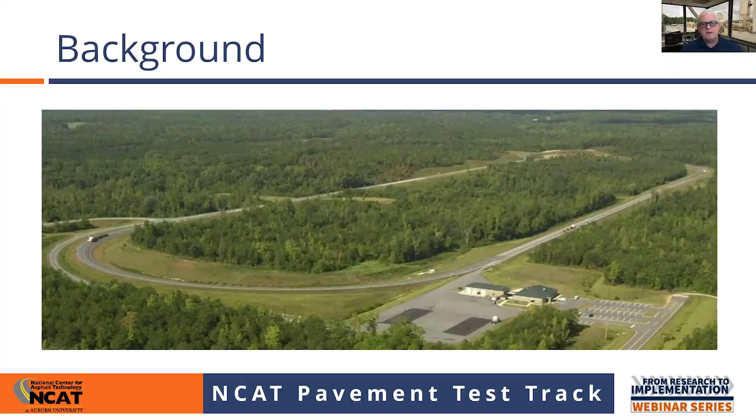But sports courts is different. We've never built a sport court at the test track. We do work for state DOTs, for FHWA, for private sector clients. We do pavement preservation research that might be very relevant to cities and counties, but we've not done any sport court work. So now in my position with Asphalt Pavement Alliance, I was asked to do a deep dive on this topic and recently put together a presentation on it. And so that's why we're doing this webinar, because very recently I did a sport courts presentation and trails presentation for the New Jersey Asphalt Pavement Association.

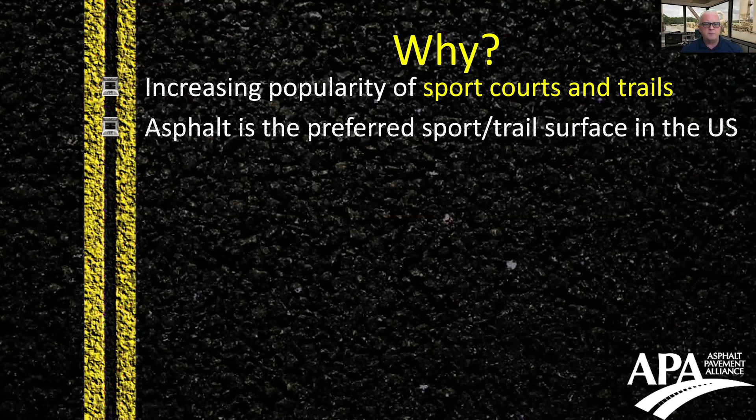So before we get into the background, why are we talking about this? Well, sports courts and trails are growing in popularity. Think pickleball courts—they're springing up all over the country. Asphalt is the preferred surface. It's the best material to build with, and there are some reasons for that.

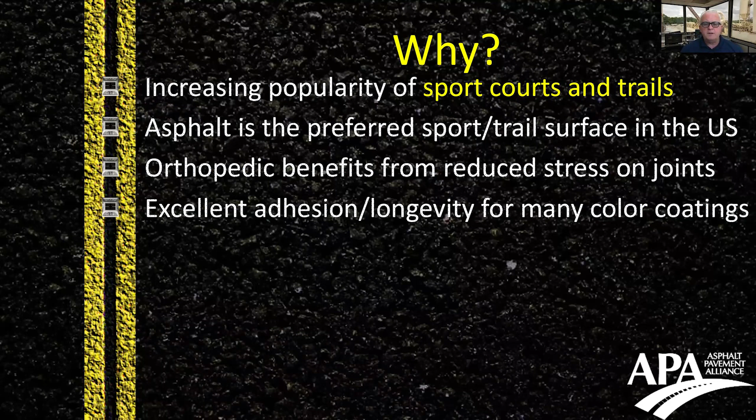There are orthopedic benefits from reduced stress due to the flexible surface you get from asphalt. You get excellent adhesion and longevity when you use asphalt with many of the color coatings that are used, and excellent weather resilience—hot versus cold, dry versus wet—really good seasonal survivability. They're durable, economical, and easy for owners to maintain.

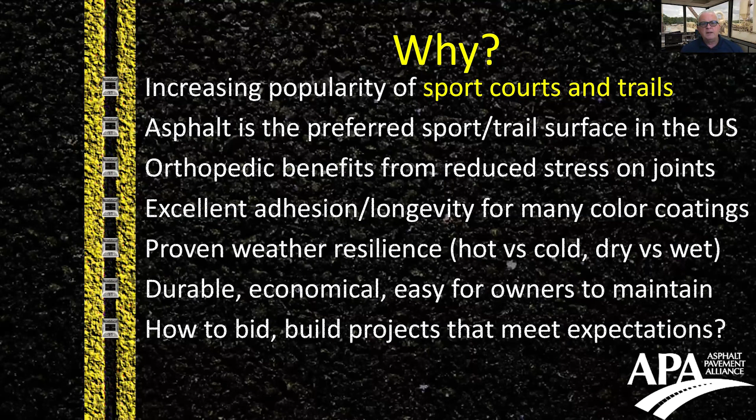And the big question, which is really why I got into this: if you're a contractor who's been doing parking lots or roads, whether high traffic or low traffic, how do you bid and build these projects to meet the expectations of the owner so it's not a closeout and acceptance nightmare or a maintenance nightmare? That's really where all this came from, and it's why we so appreciate Scott being here with us today to share his experience.

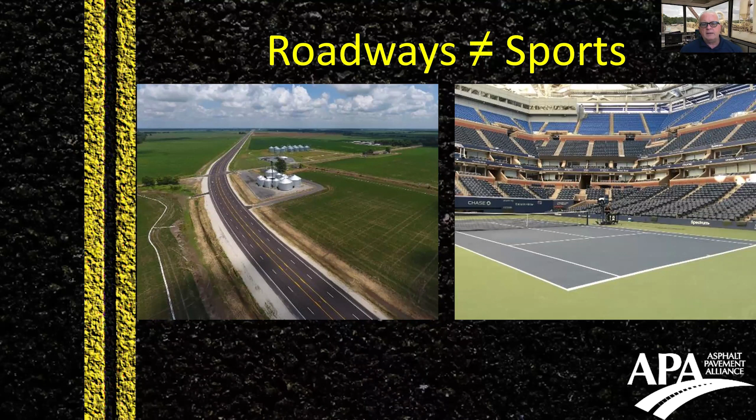What I'm going to share with you today is really a stripped down version of that. So that's the background, and the main initial point here is that roadway surfaces are not equal in any way to sport surfaces. It's a completely different type of work, and that's why it's really important that we meet today to talk about this topic.

ASBA is the American Sports Builders Association, and they have a really good website with resources at sportsbuilders.org. If you want to learn more about what will be required of you in terms of a specification to build these types of facilities, you can go to sportsbuilders.org and download a specification and see information about specific products and such.

So what's different about these facilities? Well, surface tolerance and macro texture are really key things. Surface tolerance is what we're trying to control to avoid bird baths and depressions that create functional problems on these surfaces. Macro texture is essentially the roughness you feel on the surface of asphalt when you run your hand over it.

High-speed roadways tend to have higher macro texture. Parking lots have lower macro texture. Sports courts have low macro texture, meaning they're smaller, finer mixes. Heavy vehicle loading is not the design criteria for sports facilities, unlike roads. Resistance to cracking is a primary consideration with these surfaces.

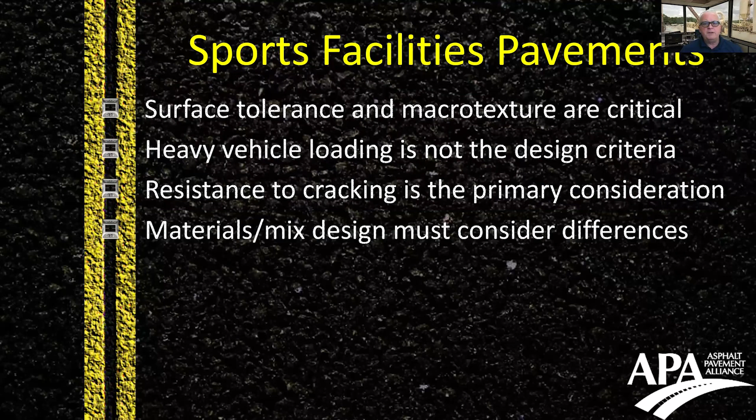The materials and mix design used for these have to account for these differences. If you're a paver working on one of these, you don't just call a plant and say, hey, what kind of mix are you running today, send me so many tons. You have to have the right kind of mix.

I think Scott is going to have a few things to say about that when it's his turn to speak. It's a good idea to use a DOT approved mix producer, because when they're DOT approved, they have to have a QC plan, the plant has to be inspected, and they have to be credentialed. Of course, we encourage you to use a SAPA member, a State Asphalt Pavement Association member, and there needs to be a QC plan in place to make sure the mix you buy meets your expectations.

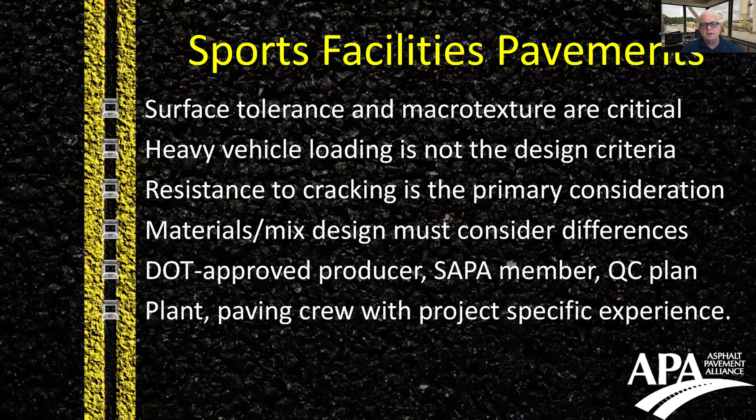One of the key things for success here is you need a plant and a paving crew with project specific experience. In other words, if you're going to build a sport court, it's a good idea to do some research to find someone with a resume and a specialty in this area, like Scott's company has, rather than going through some open competitive process without checking the credentials of the crew. You need to make sure you have someone who's proven they can do a good job with this.

So the Sports Builders Association has an established set of mix design criteria.

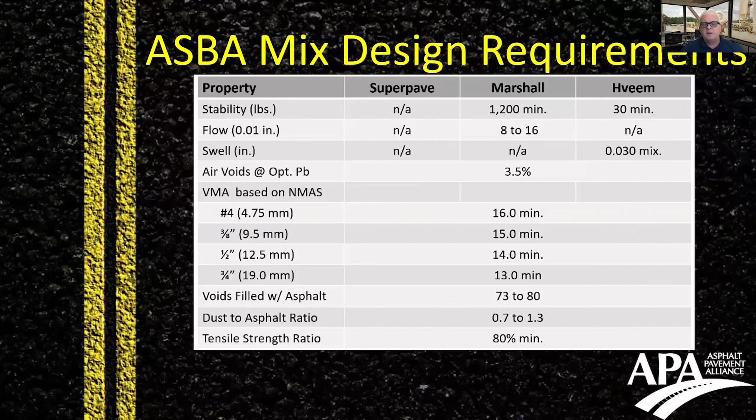These are Marshall mixes based on the specification I looked up, and there's a VMA requirement. Essentially, it's just saying we want this to be a healthy mix. It's a 3.5% air voids mix, with a Marshall stability and flow requirement, and even a TSR requirement to make sure it has good resistance to moisture damage. These are all criteria familiar to those of us who do roads and parking lots - specifications intended to make sure the mix you buy is going to be a healthy mix.

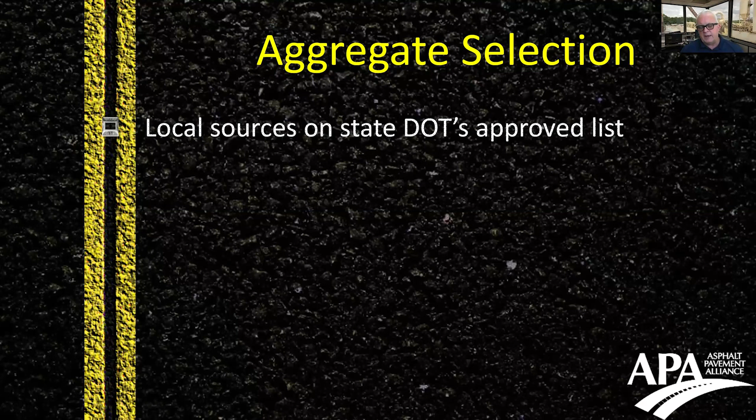For aggregate selection, you need to use local sources on your local agency's approved list. Typically, the specifications for these types of projects say no deleterious materials - things like shale, pyrite, clay balls - and you'll see why that's important as we go through this presentation. No slags, you don't want metallic materials. Variable gravity is an issue, and the absorptive nature of the materials can be a challenge. But the main thing is the metallic nature, so you don't get rust stains on the final surface.

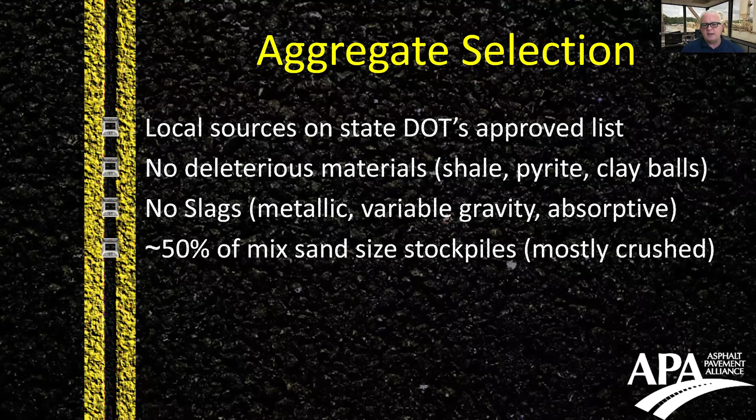About half of the mix is sand size stockpiles, typically mostly crushed, because of the size of the mix. Natural sand in this mix needs to be limited to 20% - you don't need more than that - mainly because of the moisture sensitivity of those materials and the mix tenderness issues that can lead to.

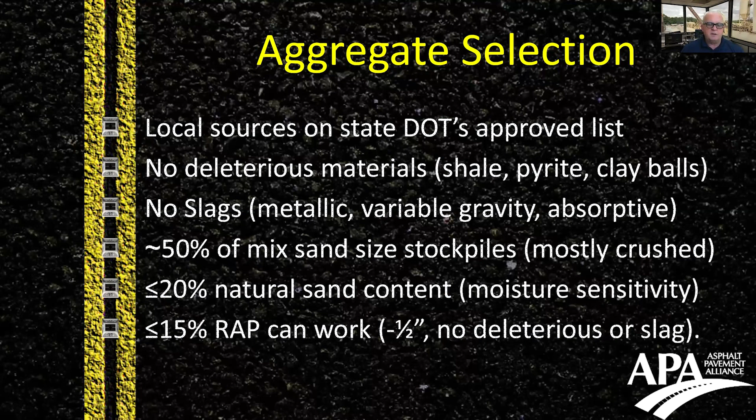You can make up to 15% RAP work as long as it's processed minus a half inch and fits the gradation of the mix being produced, and as long as the RAP doesn't have any deleterious materials or slag. So essentially, if you've got RAP with the same material limits as the virgin stockpiles, you can typically use up to 15% in this mix. But I would be very cautious about that, depending on how much experience you have with the mix and the material.

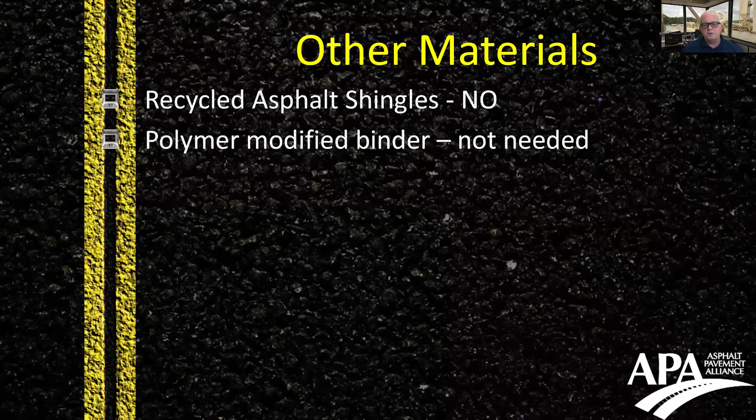I wanted to go through a list of materials that, depending on your jurisdiction, you may or may not use in asphalt for paving parking lots or roads. For sport court mixes, you don't want to use recycled asphalt shingles, which have a tendency toward what I've described as flash stiffening - as the mix cools, it can get really, really stiff, depending on how it's produced and what complementary products might be used with it. So it's a good idea not to use asphalt shingles.

You don't need polymer modified binder for these mixes because, again, they're not supporting heavy loading. Ground tire rubber is optional - you might have a client who wants to use rubber in the mix because they believe there's a flexibility benefit, or an environmental reason why it's a good idea to include it, so you can use it. You don't need fibers for these mixes either, cellulose fibers or the high strength aramid fibers. Again, this is not a heavily loaded mix, so you don't need to really spend money on those types of additives.

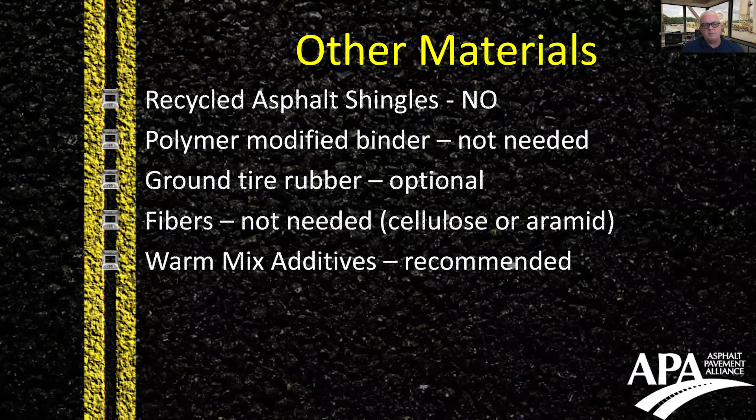I personally would recommend you use a warm mix additive, and the reason why, based on what I know about this type of work, is that the warm mix additive is going to make hand work easier. It's going to give you better workability, and it's going to get you protection from moisture damage. So there's a lot of reasons why warm mix is a good idea. You're not talking about a lot of tons required for this work, so the cost is not going to be really high. Anti-strip additives as needed based on TSR results, noting that many warm mix additives are also liquid anti-strips.

People often ask about recycled plastic, just because we want to be sustainable and be good stewards, so there's a lot of desire to use things like recycled plastics. The best thing I can tell you at this point in time is it's way too early to tell. There are some products out there that have the potential to work, but you want to be careful.

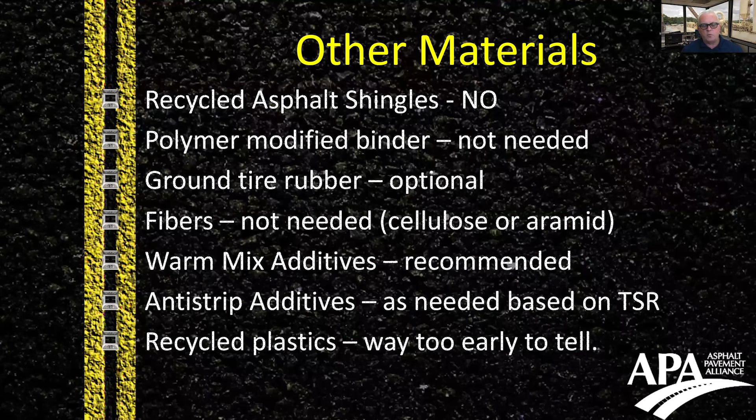First of all, if you're buying a plastic additive, know what percentage of the additive is actually recycled plastic and what percentage might be virgin plastic or some other type of polymer. And if it's 100% recycled plastic, you should be very cautious with the impact that it's going to have on mix quality, workability, and compactability.

So for a typical sports court design, my advice to you, if you're a paving contractor doing the foundation and the base and then also doing the paving, that's always different because your responsibility is quality for the entire job. But I always caution people, if you're just an asphalt contractor and somebody else is doing the foundation, make sure you go out there and verify the grade before you mobilize. Otherwise you might move a lot of equipment onto the job, spend a whole bunch of money, and then find out there's not a good tolerance on the base before you start. I'm sure Scott may have some information to share about that.

The lower layer of asphalt, a typical tolerance requirement is 1/4 of an inch over 10 feet, with a 10-foot aluminum straight edge, no more than 1/4 inch of deviation. The upper layer of asphalt has a tighter requirement, 1/8 of an inch over 10 feet with a 10-foot aluminum straight edge, so you don't end up with big surface deviations or surface anomalies that affect the use of the court.

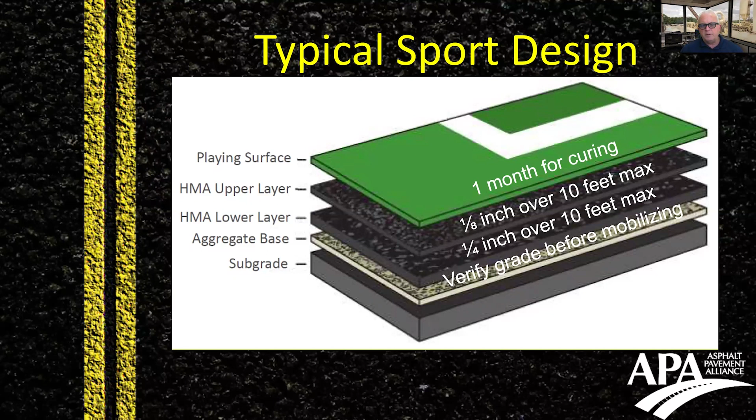And then of course you have a playing surface on top of that, which might be some type of coating. Before you apply a coating, you allow a month for curing, similar to doing roadway work and waiting to apply thermoplastic, to make sure that some of the lighter components of the asphalt have had an opportunity to work their way out, so the mix isn't changing significantly.

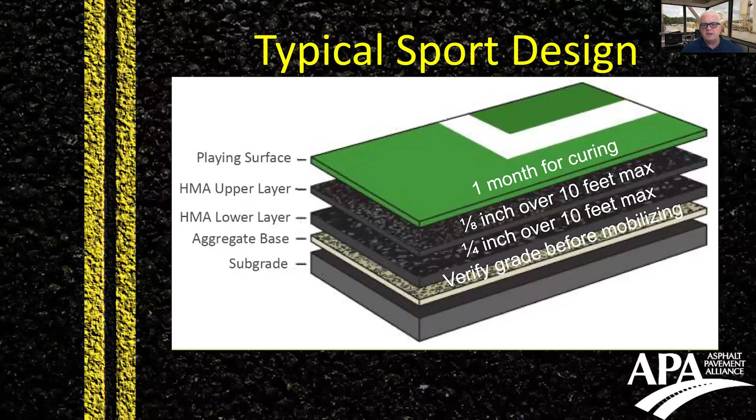Grade control is the big thing with these types of projects. Even though my practice has been mainly limited over the last few decades to the NCAT pavement test track, grade control is really important to us, because when we're doing research thickness, we need to build pavements to precise thickness, and have smoothness that's very good so roughness doesn't confound the outcomes of our experiment. So I'm very sensitive to grade control issues, but sport courts are a whole new thing because of that 1/8 inch tolerance over 10 feet with a straight edge. You have to make sure you have this under control.

There's actually a big misconception out there. I think people think, well, with RTK GPS, I can easily go out there and set up and control my jobs. RTK GPS will do a really good job of getting you an X and a Y for grade control, but it does not do an adequate job of getting you a Z, an elevation. You've got to have lasers out there to get elevation. You can rough grade jobs with GPS, but you better final grade jobs with lasers to make sure the elevation is precise. If you don't do that, you run the risk of having a job that doesn't meet the needs of the client, and then it's something you're going to have to come back on.

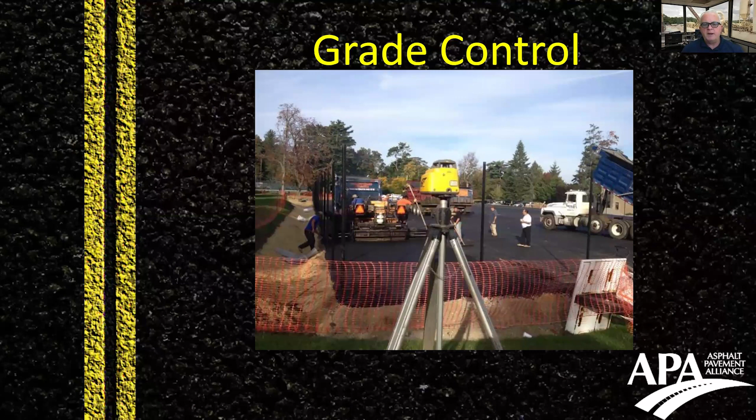There's lots of options now for 3D grade control systems. You can buy pavers if you're doing a mill and pave job. You've got the option for 3D grade control on mill machines and pavers, and then there's aftermarket hardware as well. So when you buy new iron, you can buy it already equipped, or you can retrofit it from several different manufacturers.

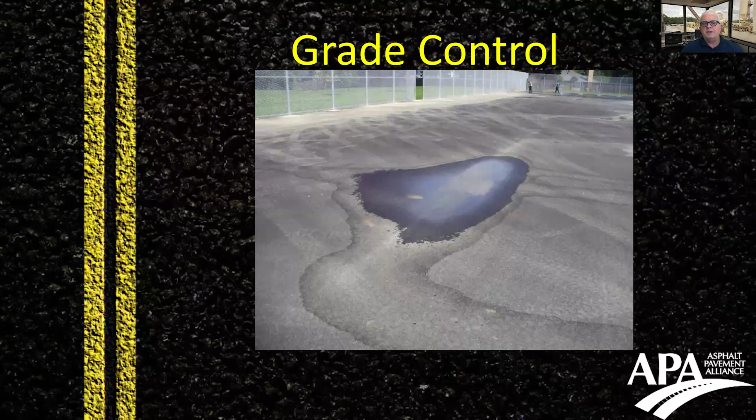This is the reason why grade control is really important. If you end up with low spots out there, you're going to have water ponding, and then you're going to have cracking issues associated with that, and use issues associated with that. So you really want to make sure the surface is as true as possible, and make sure it drains as it's designed to drain when it does experience rainfall.

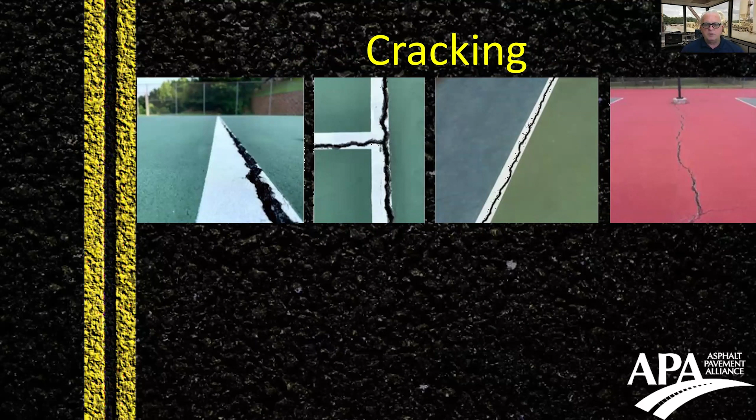Cracking is something that we work really hard with these surfaces to control. It's not uncommon to see these types of cracks on sport courts, and they're often affiliated with the striping. Extreme temperature change is typically the initiator of these types of cracks.

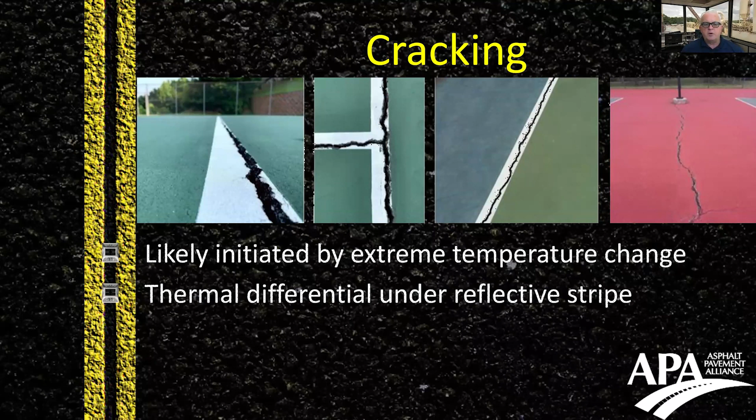You have big thermal differentials under the reflective striping. In other words, the blue, the green and the red have a very different temperature than the striping applied to it. The white stripes reflect heat and the darker colors absorb heat, so there's big thermal differentials under the reflective striping.

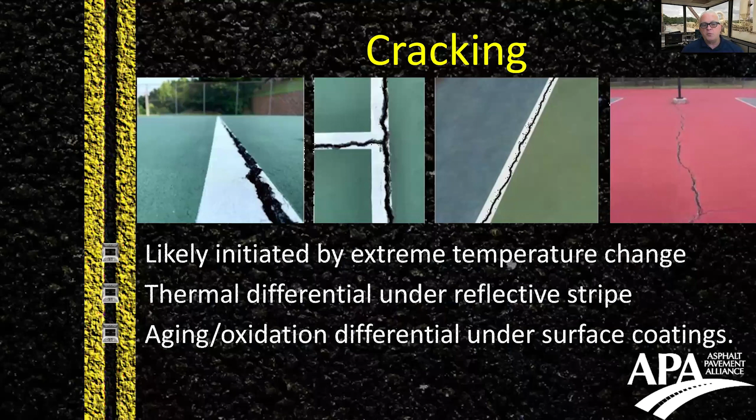And then you have aging and oxidation differentials under the surface coating. So there's a lot of reasons why cracking does occur, and we need to have a plan, when you build these surfaces, to delay the onset of cracking as much as possible. And then maybe when you resurface these, you have to have a plan to mitigate and control future cracking.

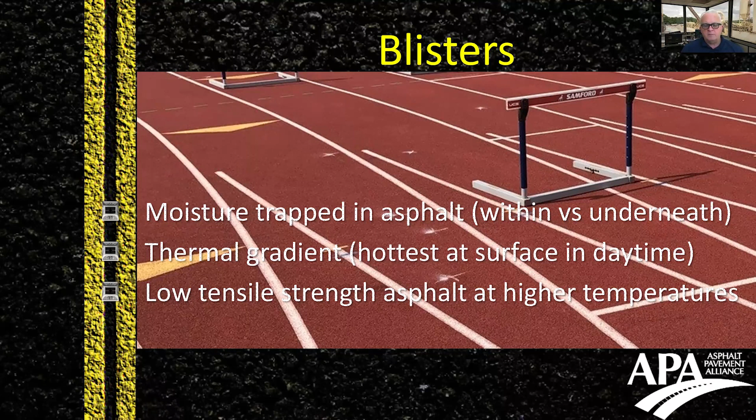This happens when you have moisture trapped in the asphalt, either within it or underneath it. This can be an issue when you have thermal gradients. The hotter temperatures are at the surface in the daytime, so it can create pretty significant thermal gradients. At really high temperatures, when those gradients occur, asphalt is at a lower tensile strength when it's at higher temperatures.

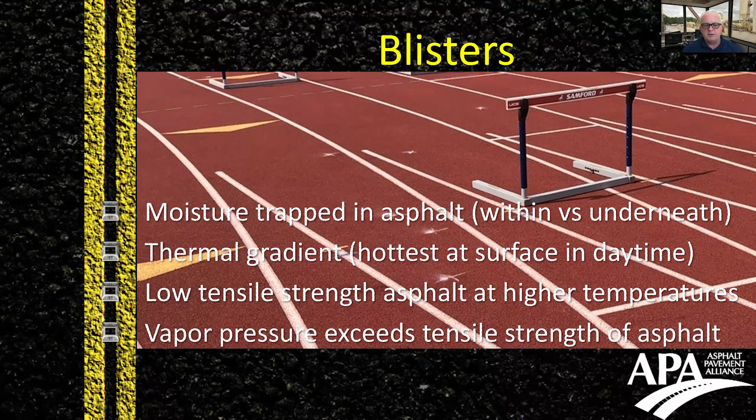And then you have these blisters occur when vapor pressure exceeds the tensile strength of the asphalt. So you have water trapped in there, it gets hot, you have vapor pressure build up, and when it exceeds the strength of the asphalt, you have these blisters occur, and then you can have delamination occur as well.

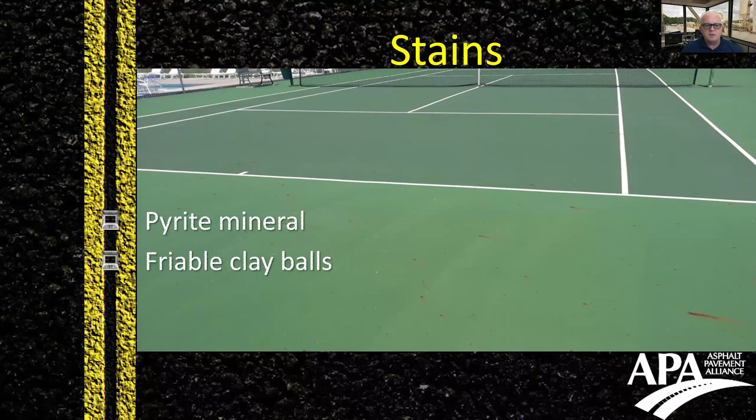Staining is also a negative. This is one of the reasons for the deleterious material limitations. You want to make sure you don't have any metallic or slag material in these courts. Pyrite minerals, friable clay balls, metals, and slag - those all can create stains, and when you have this really nice expensive surface, you certainly don't want to see those types of stains.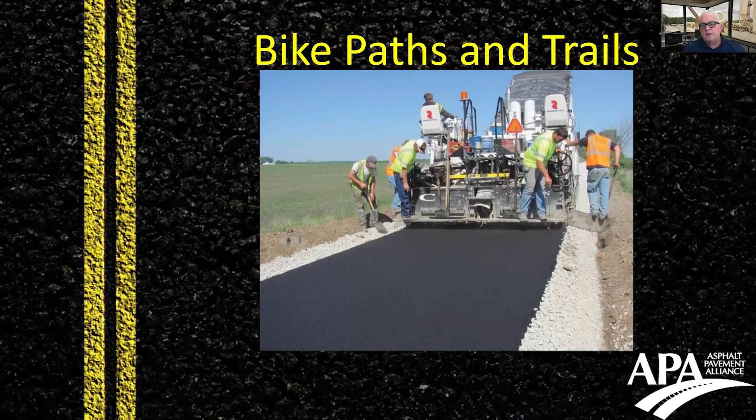Bike paths and trails, we're not going to spend a lot of time talking about those because they're pretty similar to roadways in a lot of ways. You can use the AASHTO design for pavements and shoulders with drainage and everything. You can use the same types of design principles for bike paths and trails.

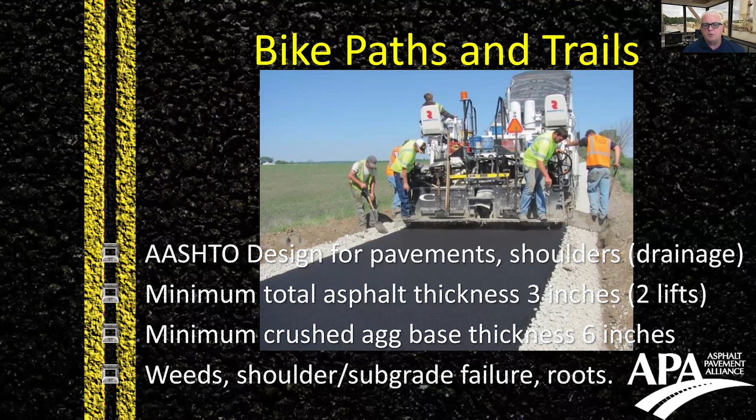You're typically looking at a minimum total asphalt thickness of 3 inches, probably 2 lifts, and a minimum crushed aggregate base thickness of maybe 6 inches. The big concern there is weeds and roots, and then shoulder and subgrade failures, especially near the edge of the pavement. You have to approach this sort of like a low volume roadway, and just make sure you do a really good job with the design and with the buildup.

In terms of trails and bike paths, one of the online resources I really advocate for - and I encourage you to screenshot this if you're interested - the USDA has a web soil survey that you can get to. It's free on the internet, and you can look up soil types and investigate groundwater conditions.

There's even a tool in here where you can box out an area and say, I want to build a bike path in this area, or some specific type of structure in this area - what general guidance would you recommend based on the soil and water conditions on this site? It's a great tool for doing preliminary design work.

I actually use this - I teach a course in pavement forensics. I did a pavement forensics educational session at World of Asphalt. This is a great website to use for either design purposes or for forensic purposes.

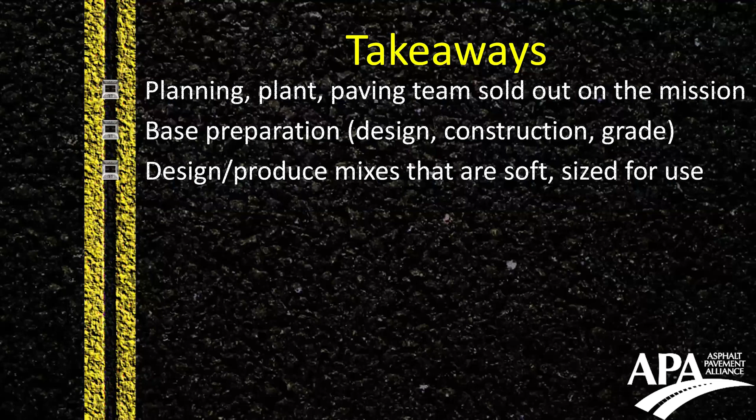Whether you're producing the mix or buying the mix, the way Intercounty orders and buys these mixes, you've got to make sure that the mixes are sized for the use. You wouldn't want to put a more rugged, stiffer superpave mix as a surface on a sport court. Scott mentioned that's what he called a playground mix, a quarter-inch size mix. We would call that a sand mix, maybe a sand screening size mix, but something you'd typically use on a parking lot, or maybe even a little bit smaller. It's got to be the right mix for the right job.

Got to have the right aggregates in it, not too much RAP, and the right kind of binder grade. If you've got just a handful of trucks out there doing this work over the course of the day, and your mix has got too much RAP in it, or the wrong kind of binder grade, you could lose workability very quickly and not be able to get the material down and compacted the way it needs to be.

Don't neglect quality, and that goes beyond just the grade control. The mix needs to be healthy—the right binder content, the right gradation, the right voids—and you have to compact it.

One of the nice things about capping these structures with what Scott described as a playground mix is those mixes compact easily and become impermeable at lower levels of density. It's not like you've got to hit a perfect 94% density to make it impermeable like you would on a roadway. As long as you get good compactive effort and seal the surface up, it's going to be relatively impermeable. But you do need to make sure you do a good job and get it properly compacted—again, the hyper focus on grade control to prevent the birdbaths.

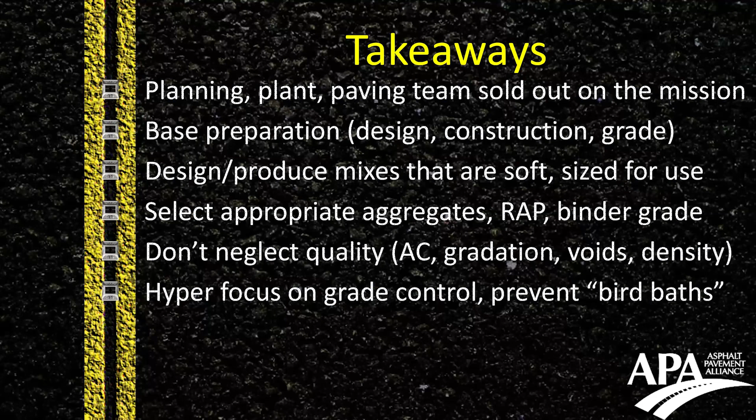Noting what Scott said about the coating subcontractor—a good coating subcontractor can essentially level the birdbaths with the coating material they provide, as long as they're not too bad. But you can prevent those with the right kind of grade control effort.

With cracking, you can saw and seal the cracking to kind of control it, and that's not something we talked about in the presentation, but there are some really good standard practices you can find online. Essentially, with saw and seal, you're saying: I'm probably going to have a crack here over the long term, so I'm going to do a masonry saw cut and fill it up with crack sealer before my final coating. That way you manage the crack and make sure it doesn't materialize on the surface in an uncontrolled, ugly, irregular way.

Really, what all this is about is bidding and building profitable and successful projects that you don't just close out, but like Scott said, Intercounty has the kind of reputation where they want to be known for doing good work, so that they're asked to come back and do future work. It's not just about bidding and building for profit—it's about doing that in a way where your customers want you to come back, and it's easy to get more work in the future.

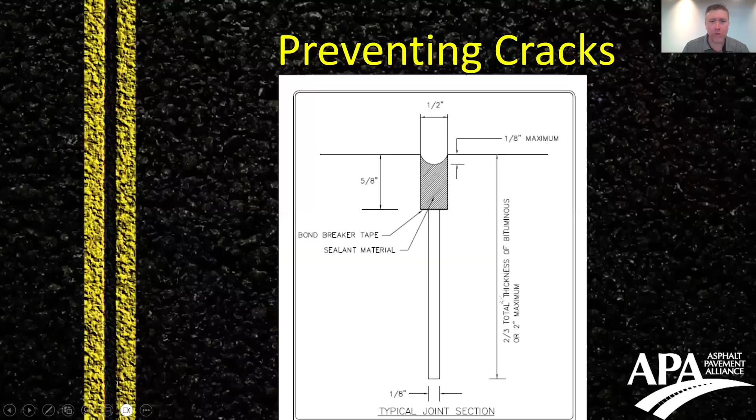On one side of the fence post, and then they went on the other. This is exactly what we try to avoid, because it's very typical to be able to pave, you've got to stay inside. The fence post isn't in, but the foundation is, and you've got to pave up to that. So the limits kind of lay out where you should be paving. These are things we try to avoid, because then we've got to fit inside of the center net anchor, so you're very tied to what you can do. That's why we try to keep things off the lines and stagger the joints.